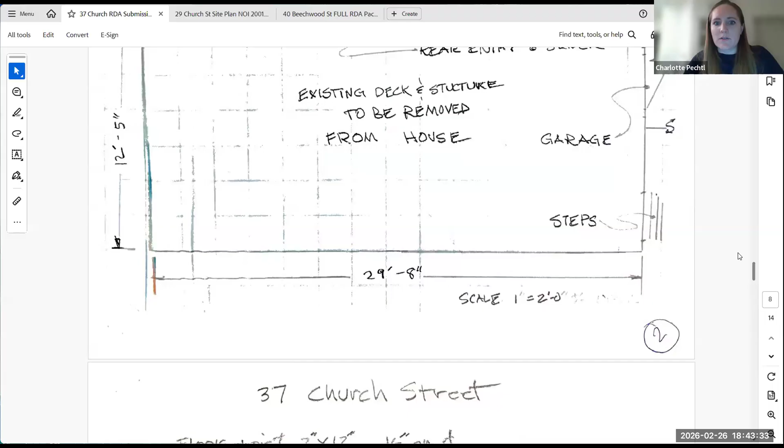Sorry, I thought I had this on here. There we go, get down to this. So these are structurals that were submitted to the building department. I just wanted to get to the plan that would help you guys. This is an aerial, so the 3-season porch will be installed in the same footprint as an existing open deck. We're going to need 3 sonotubes, so this will be raised, no foundation installed.

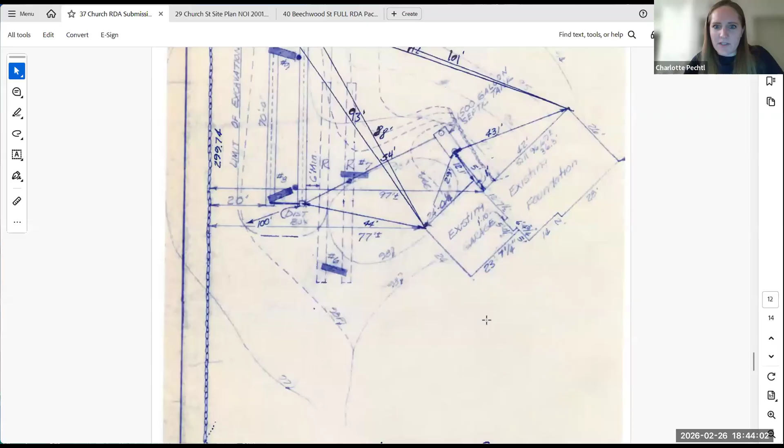I don't know where his well is, basically we put this together to try and help him submit an RDA. And from a wetlands perspective, there are wetlands on the abutting property slightly north. We don't exactly know where the wetland ends, but I spoke to the homeowner and he was comfortable submitting an RDA and not asking the commission to verify any wetland lines, just assuming that he's in the 100-foot buffer zone. I do not believe he's in the 50, based on where the existing wetlands are on the opposite side of the site. So this is a wetland delineation.

For this half of the site, his project is going to be around over here. So again, we don't know where the official line is. This is from an old septic plan, but based on the vegetation and contours here, we definitely know there's a wetland, we just don't know where it ends. So that's why I just had him submit an RDA for the proposed screen porch over the existing open deck.

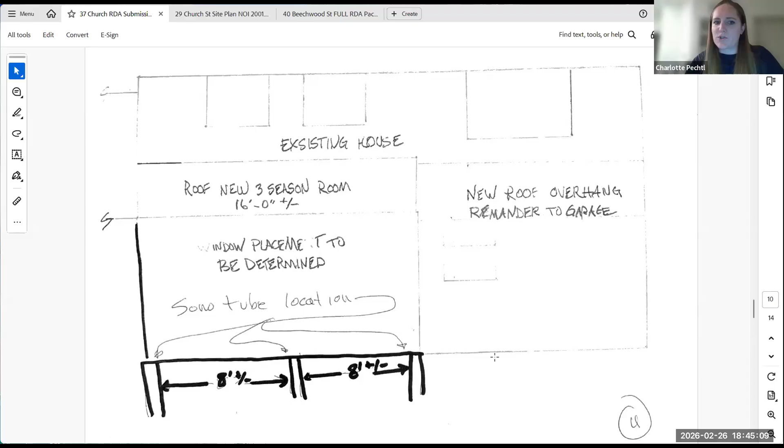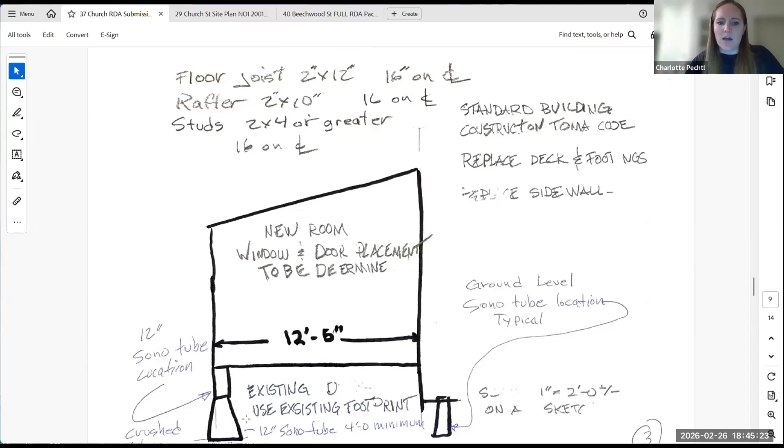Footprint, so there will be an increase in roof runoff. But since the screen porch is going on 3 sonotubes, he clarified this design with the building commissioner. At least from a buffer zone perspective, other than the roof increase, there doesn't appear to be any additional impact from what's already there, because the existing deck is already on piers and it's pervious. So again, the only change would be the increase in impervious. Obviously, some temporary work in the buffer zone during construction as well.

Do you guys have questions on that? This is the RDA he had put together. Let's see, what was the size again? 12 by 16, but the existing deck is the same size.

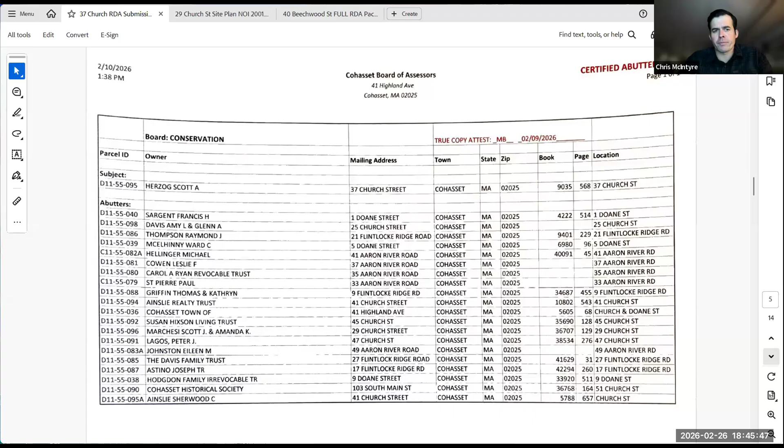So we're assuming it's in the 100, but we're not sure, and you're quite sure it's not in the 50. I'm very confident it's not in the 50, but I am also very confident that some portion of the work is definitely in the 100-foot buffer, based on what we were looking at in the files and on site. It's just hard to figure out where the wetland is right now because it's covered in snow. But in speaking with the applicant, he doesn't want to investigate the wetlands.

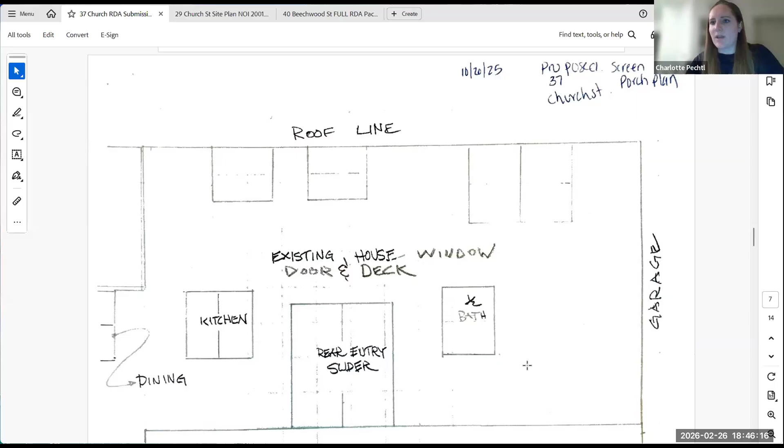He is aware that there's a wetland over there, and his work could be within that boundary. Okay, and again, it's already a porch there. It's just building, up. I was gonna say this picture within might be more helpful.

So this is the existing home. The wetland delineation we have pretty much comes to here. So looking at contours and vegetation and looking at the site and other delineations, there are wetlands up here. There's an intermittent stream that goes at the very front of the driveway.

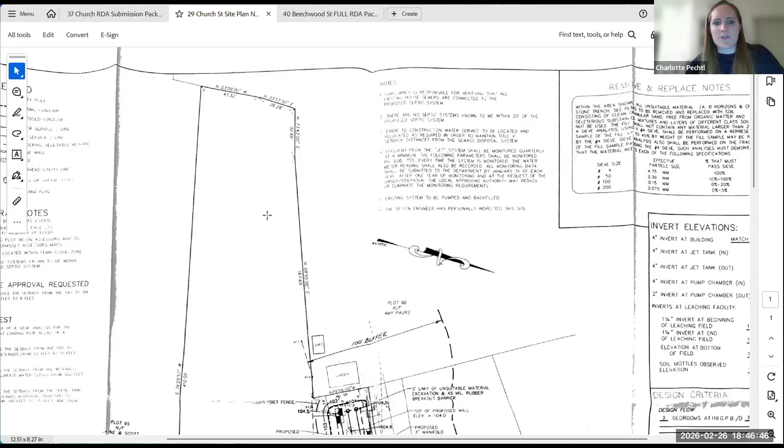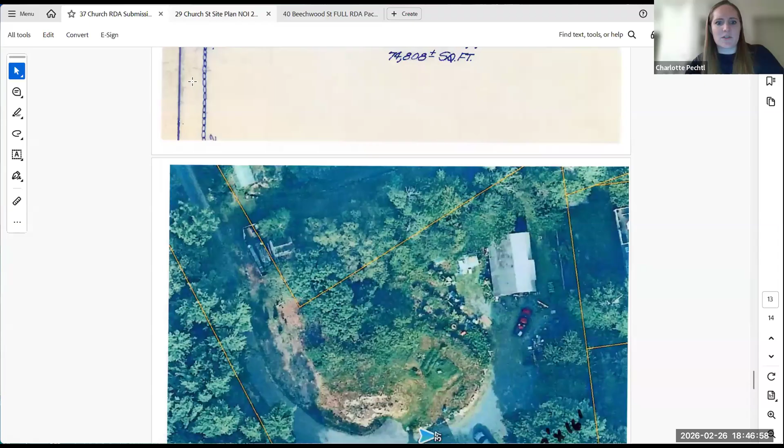A little bit easier to see, but there's another wetland up towards the driveway on the same property at 29 Church Street. This wetland here, with an intermittent stream, goes across to 37 Church, which is the property we're looking at, and there's an intermittent stream at the front of the driveway.

So this wetland and intermittent stream, at least in this area, is well over 100 feet away from the back of the home. But this wetland back here, we only have a delineation halfway down the site. Looking at the contours, we can assume there's definitely some sort of wetland, we just don't know where it ends.

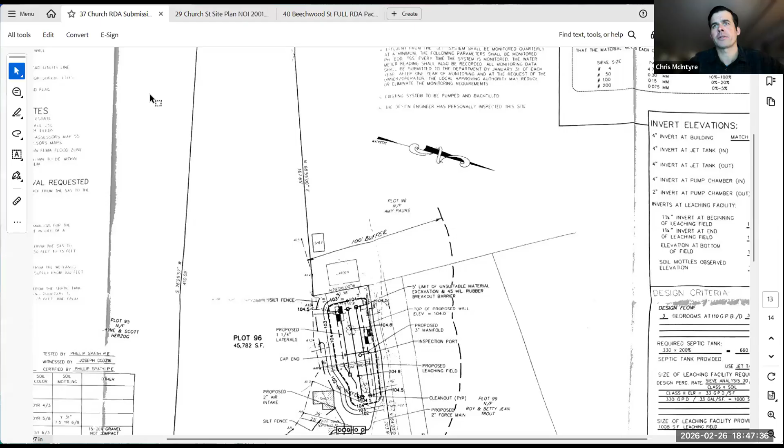He didn't want to ask his neighbor to flag it and investigate it, he just wanted to assume he's in the buffer and submit an RDA for the proposed work. His application said no heavy machinery or anything like that - it's pretty basic, small scale construction. Any questions, commissioners, comments?

I don't care to make a motion. I'll make a motion then to close the public hearing and issue a -3 and -6 determination of applicability for RDA 26-02 for 37 Church Street. Our standard conditions for working within the 100, just that no heavy machinery be used, that sort of thing. Do I have a second?

I think you're muted, Kathy and Steve. You're both making seconds. Second. I will second, thank you. I'll take a roll call vote.

Steve Magnell, aye. Kathy Berrigan, aye. Will Ashton, aye. Chris McIntyre, aye. That vote passes 4-0-0.

So that RDA, I'm 90+% confident it's not in the 50, so I don't think you need a variance. Okay, yeah, that's what I was just thinking. All right.

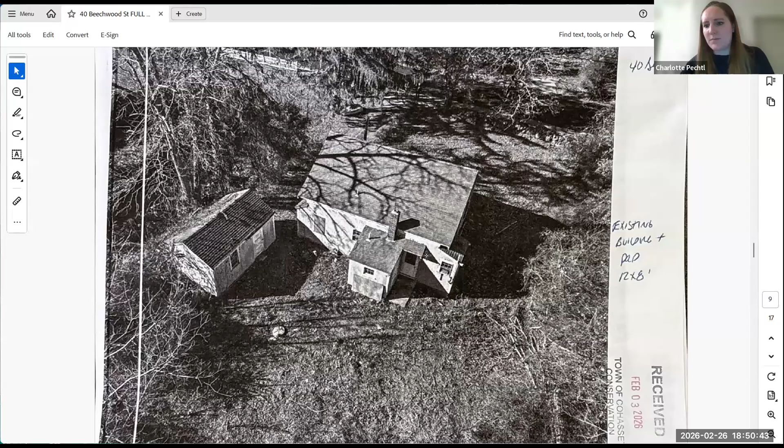That's a good one right there. You can see that building, the old building in the back. There's actually a washer and dryer and a heating system for the houses in there, you can see the chimney coming out of there. And I want to take it down.

I want to make it the same size as to the right of it, you can see a pad and a door. I want to make the building that size, that's going to be the kitchen. I'm going to push the kitchen out into that room to give it more room in the house, and I'm going to move the heating system upstairs in the attic.

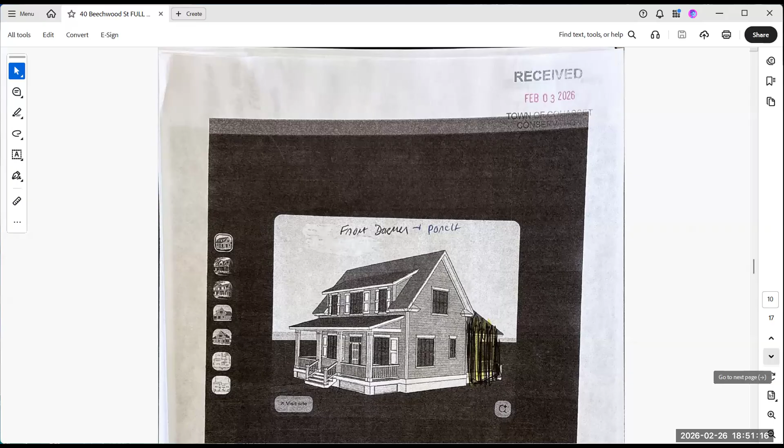And I see the front right there, that's basically to make it pretty, to tell you the absolute truth, to make a front porch on it, make it nice. We all hand dug, it's the whole reason for that front porch.

And Gary, is that existing patio impervious or pervious? The patio is cement. So it's impervious. It is, yeah.

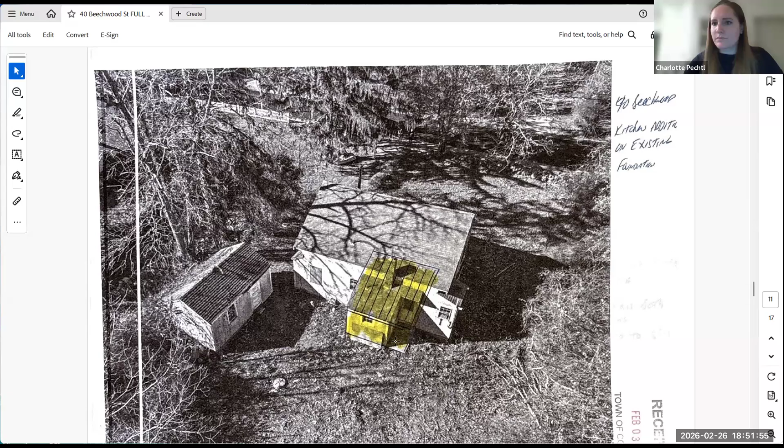Is there a porch already in the front and you're building a roof over it, or is that going to be new construction? That'll be new construction in the front with 4 footings.

And is the whole site in the riverfront? I'm not sure about the entire site, but the majority is definitely in riverfront. This is an old plan showing the wetland buffer and wetland line. So we're dealing with buffer zone and riverfront. Not sure where the 50 is, but I'm pretty sure it's not in the 50. The entire project is within riverfront, though.

So would work be done with heavy machinery? What are we talking about for constructability here? What's the approach?

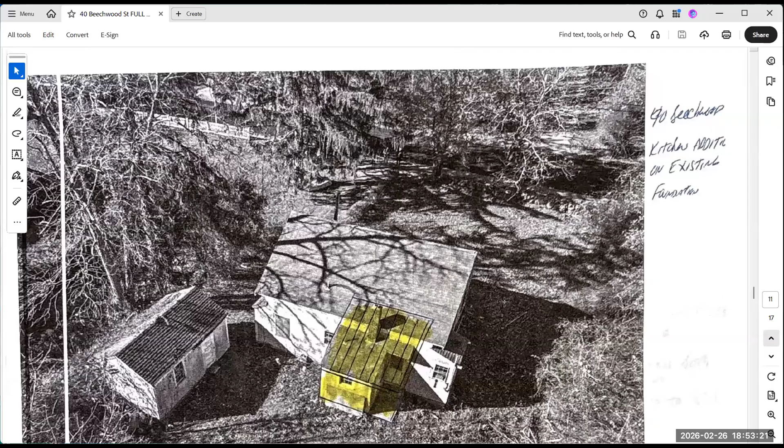For the back on the kitchen side, I'm just going to tear it right off. There's an existing foundation there already, so it'll build on the foundation, as you can see in the picture we showed, with a new roof line extending over that patio as support. You can see that roof line right there. It's pretty simple, but it opens the house up instead of leaving an outbuilding up there with a heating system and everything else outside.

Kind of weird. And for the porch, the pilings and everything, are you bringing in machinery for that? No, that's all hand dug. We dug it, it's just 4 footings, you can see the 4 posts. We always hand dig our footings, simple as that.

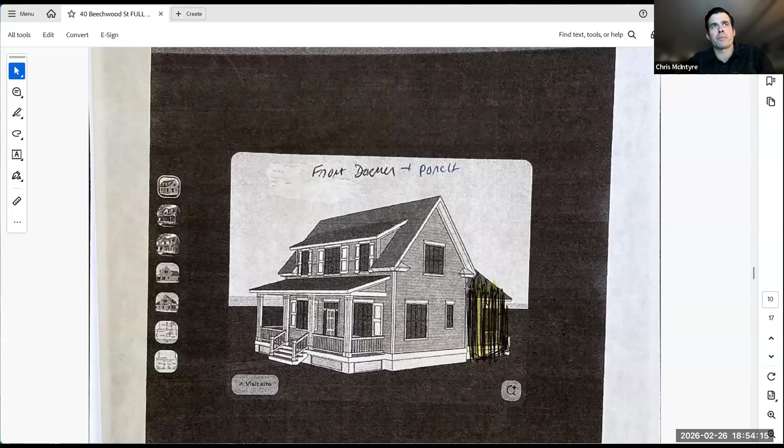Just to differentiate the two, we just saw a project assumed to be within the 100-foot buffer, whereas this is in the 200-foot riverfront, which we're presuming this is in, correct? The front and the back? Is that how I heard you, Charlotte? Yes, we consider that a resource area, not just a buffer. So there is that distinction I would just note.

There's a little bit more work here. Commissioners, any comments, questions, or input here? Steve?

Muted, Steve, if you're saying anything. I don't know. You're still muted, Steve.

I'm just trying to see where the river is. I'm looking at Near Map to see where it is with respect to the building itself, because certainly all of the areas are within the buffer zones of the pretty much adjacent wetlands.

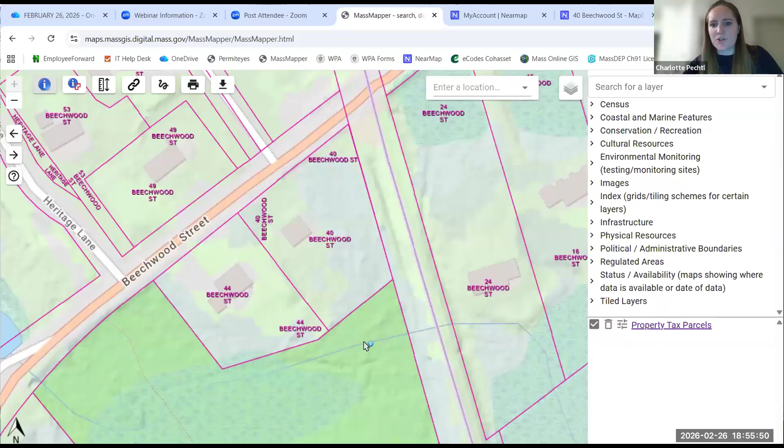It's about right here, Steve, plus or minus. We have to go by mean annual high water, but just in terms of where the river is, I could even show Mass Mapper. I know this is obviously not an official delineation, but...

If you were to approximate where the river is, what's the distance to the front of the house? Just kind of ballpark it. Oh, to the street, hold on.

To the street it's probably 100 feet. Yeah, but actually to the river you're pretty close, Chris, plus or minus. The back of the home is definitely there. The porch may actually be just on or just outside riverfront, depending on where that mean annual high water line is. So the front of the home could potentially not be in the riverfront, or partially in it. It depends on mean annual high water, not the bank of the river.

The green areas are the estimated wetlands, but obviously this is not an official delineation, just going by estimated state wetlands. We had an old septic plan that doesn't show riverfront, but does show where that wetland delineation line is, which is a little closer than what Mass Mapper showed. It's hard to see, but there is a wetland line there.

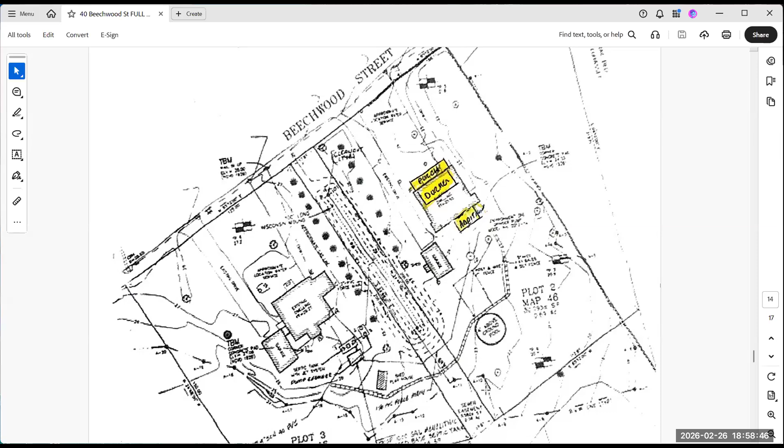What happens where the doorway pad is? That's to make the kitchen a little wider. Since it's already impervious, I think we might as well take advantage of the space instead of making it 12 feet - make it more like 16 feet for the kitchen. And we're only adding 25 square feet of new roof.

Kathy, do you have any comments or questions? No, I don't. Will, your thoughts? No, it seems the porch is the new impervious, and it seems it's either at the edge or outside of the resource. I don't think there's any adverse impact on this.

Okay, good. Anyone care to make a motion? Steve, are you satisfied? Or do you have any further questions? Don't have any others - no, you're not muted, Steve. I don't have any other questions.

I'll make a motion to close the public hearing and issue a -2, -3, and -6 determination of applicability for RDA 26-01 for 40 Beechwood Street with the condition that if there are any changes to the proposed plans in terms of building methods or foundation alteration, that we'd be notified and we would probably revisit at that point. But as the plan is, that's fine along with our standard conditions.

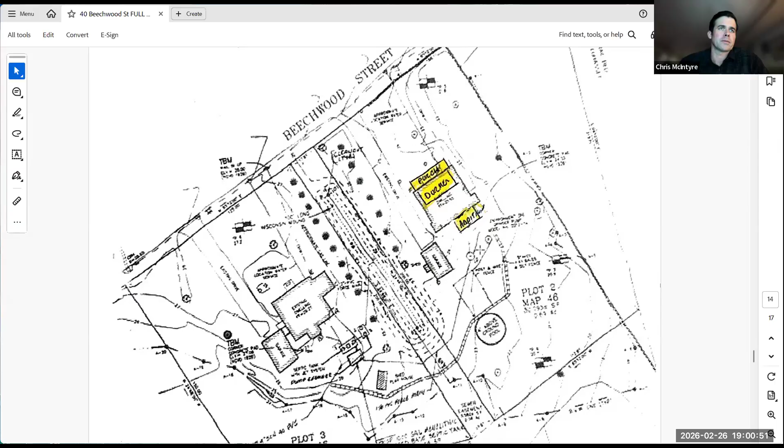Okay, I will remake the motion to close the public hearing and issue a -2, -3, and -6 determination of applicability for RDA 26-01 for 40 Beechwood Street with the condition that the applicant work with the agent for sedimentation controls and that any alterations to the proposed plans also be brought forth to the commission.

Do I have a second? Second. Thank you. With a motion and a second, I will take a roll call vote.

Steve Magnell... Steve, you froze. Oh Steve, can you hear us? I can hear you, everything was frozen there for a second. We're just going through the voting, so you're up. Steve Engel, aye. Kathy Berrigan, aye. Will Ashton, aye. Chris McIntyre, aye. That vote passes 4-0-0.

And we don't need to make a variance, so RDA 26-01 is closed.

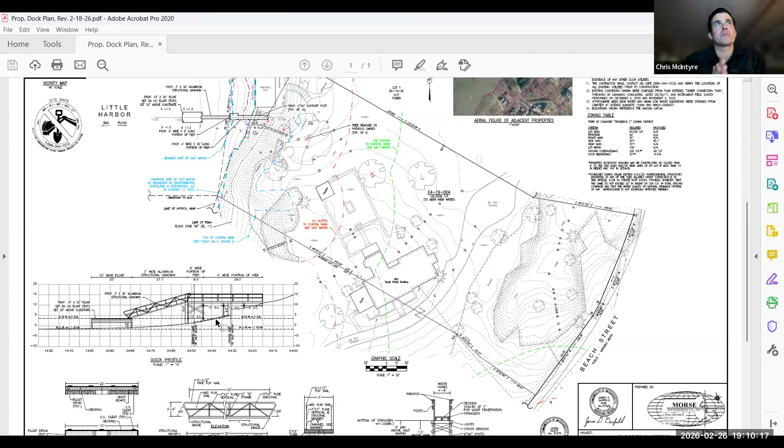And the methodology for driving the posts? Sure, so they're essentially driven by hand. It's a tripod setup, so you bring out a tripod that has a weight at the top of it. That weight gets dropped onto the post, and they drive them that way by a tripod. It's not a machine, it's not a pile driver, it's a manual driving. And the access to the location for the pilings, how would that occur? Sure, so across the yard here, you'd carry the materials down to...

Right now there's a retaining wall along the embankment, with a concrete pad up at the top. You would access over that wall. This area is cleared of vegetation, a cobbly beach area, and all materials would be brought in by hand coming off the driveway.

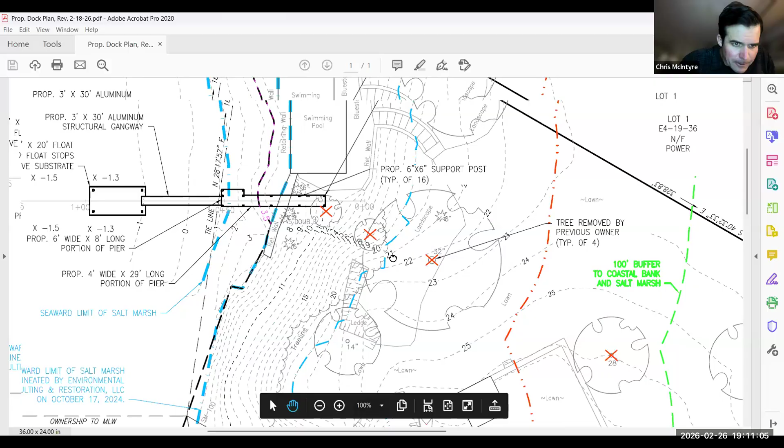Trying to distinguish where the pilings are versus the marshland. The marsh line is this blue line right here.

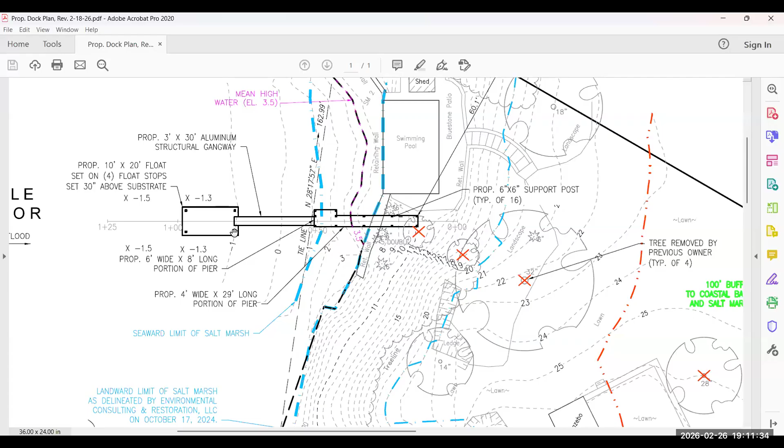There are 3 pilings at the end of the pier that would physically be in the marsh grass, and 4 pilings out at the float. Those are below the float, out in the mud flat versus the salt marsh itself, and they're there to keep the float off the bottom. When the tide goes down, there are float stops on those to keep it from sitting on the bottom.

The contractor uses plywood when working. They'd be waiting for the tide to go down and accessing it from the mud flat itself, not bringing any barge or equipment in that way. It's all accessed overland.

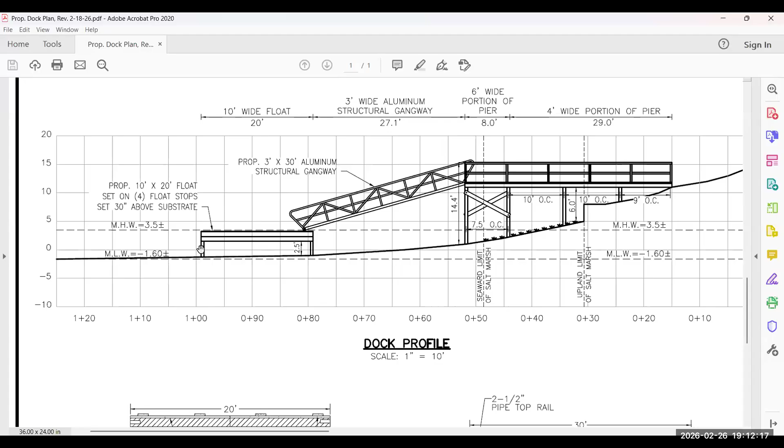Thank you. Steve, any questions or comments? No, I don't have any comments on this. It's a pretty straightforward dock on Little Harbor.

Thank you. Kathy, any questions or comments? Just wanted to say it was thoughtful of you guys, and nice that you offered to replace those 4 trees that were previously cut down by somebody else inside the 100-foot buffer. We would appreciate that if you feel like you want to do that. Thank you.

Thanks, Will, any further questions or comments? No, I'm good, thanks.

I do have one question about the trees. Was this plan initially submitted, or was it a transferred plan? I know it was continued. Sorry, Mr. Chair, we opened the hearing, read the public notice, and then continued, so this is our first discussion, if that helps. Oh okay, sorry, we have not had a prior conversation about this project, we just had to read the public notice and continue at the last meeting.

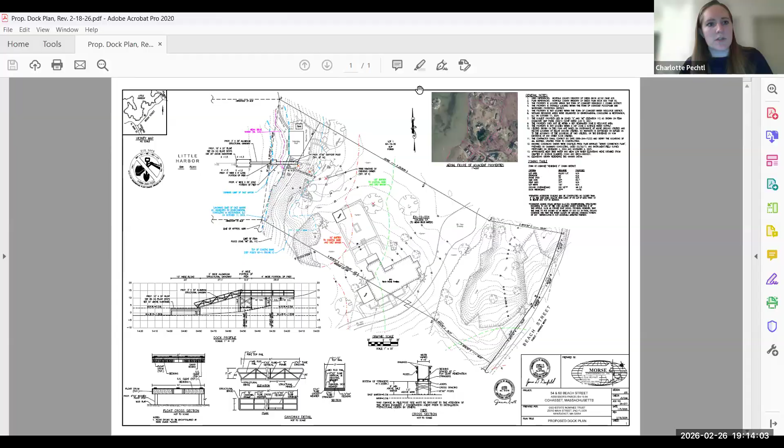And Charlotte, what's our recommended access protocol with plywood or something, is that strictly for grass or also for the mud flat? So specifically with the construction methodology we've seen with the contractor who installs I would say all of the docks in Cohasset, maybe except for one or two.

What he does is temporarily install plywood wooden boards in the marsh so that when they're traversing the marsh to install the piles, they're not walking in the vegetation and disrupting it. It helps displace the weight, but the boards are taken out at the end of each day so they're not left in there throughout the whole project.

They don't work in the mud flat, they don't use a barge, they work in low tide conditions. So they install the piles first, and once the piles are driven in, they take the plywood out and set staging in between the pilings so that they can work from the upland and then out. That's normally how they do it.

And I just actually drafted some conditions from previous dock projects that are very recent, so I can include those as part of the conditions if the commission were to issue an order.

There is feedback from DMF, isn't there, from January 22nd? Let me see, they had a few comments. I'm not sure if you can beat me to it, but I can pull them up. I don't have a copy of those with me. Okay, no worries, give me one moment.

One of them was definitely, I'm sure Greg you've seen this before, the 1.5 to 1 height-width ratio, that's kind of become a standard now. DMF acknowledged that as one of their comments, and we do comply with that with this design. I'm just going to pull up the email from DMF that they submitted back to me and to James from Morse. Again, they're good with the 30-inch clearance above the mud flat, which is the 1.5 to 1 height width ratio over the marsh.

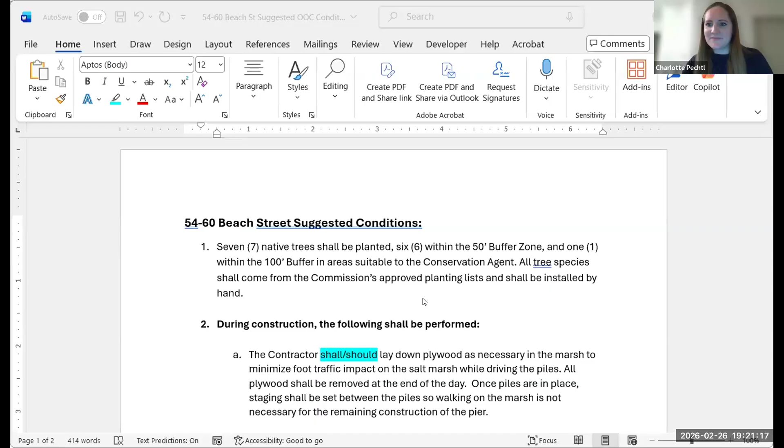We'll source that, it being from the Amazon rainforest. What's that? Mahogany or something might last longer. Yeah, exactly, some hardwood out there would.

So, just type this up so I can read through it. Seven native trees shall be planted: six within the 50-foot buffer zone and one within the 100-foot buffer, in areas suitable to the conservation agent. All tree species shall come from the commission's approved planting list and shall be installed by hand.

Did we agree on seven? Yes, I think we said two to one. So that's seven total. Okay, unless they want to do eight. More trees is better. Anything more than seven will be a very positive deviation.

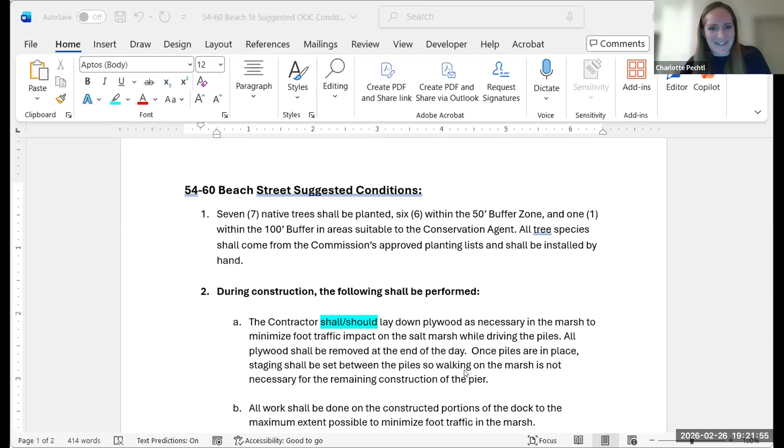So this is like, I can say 'shall,' but before I read the rest of this - I mean, Greg, I don't want to implicate the contractor at all, so I'm tempted to just say 'should.' I know he's had some questions with DEP in the past about this, but since Division of Marine Fisheries is recommending it...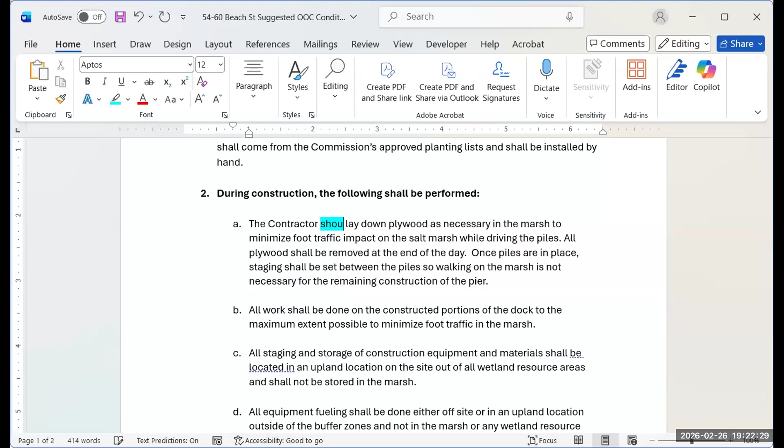I guess I could say 'shall,' but he does it anyway, so, you know. Just say 'shall.' Okay, 'shall' is fine. I know he does it, and I know we've talked about this problem before, but it's much less of an impact in the marsh, at least for the short term, because otherwise you have a million footprints in the marsh, and that could be more damaging to the grass.

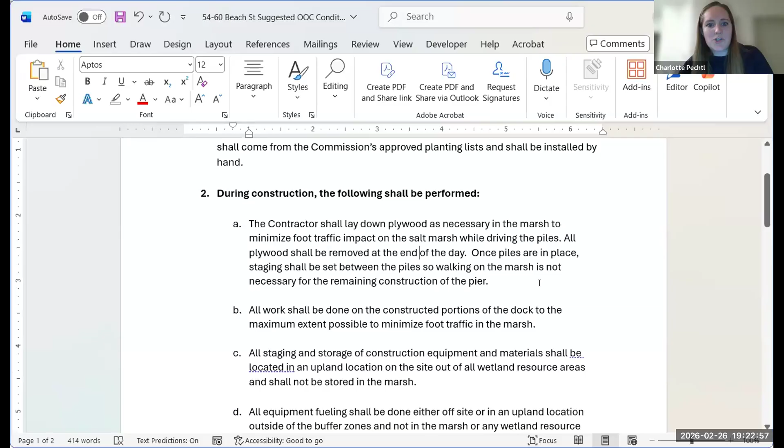During construction, the following shall be performed: the contractor shall lay down plywood as necessary in the marsh to minimize foot traffic impact while driving the piles. All plywood shall be removed by the end of the day. Once piles are in place, staging shall be set between the piles, so walking on the marsh is not necessary for the remaining construction of the pier.

All work shall be done on the constructed portions of the dock to the maximum extent possible to minimize foot traffic in the marsh. All staging and storage of construction equipment and materials shall be located in an upland location on the site, out of all wetland resource areas, and shall not be stored in the marsh. All equipment fueling shall be done either off-site or in an upland location outside of the buffer zones, and not in the marsh or any wetland resource areas.

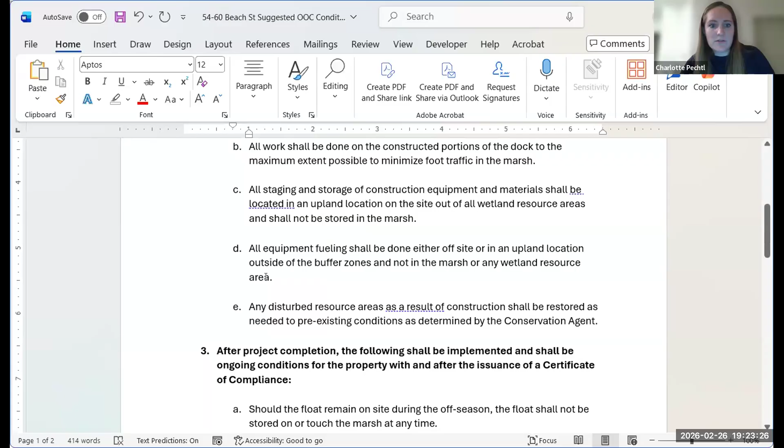Any disturbed resource areas as a result of construction shall be restored as needed to pre-existing conditions, as determined by the conservation agent. After project completion, the following shall be implemented and shall be ongoing conditions for the property with and after the issuance of a certificate of compliance.

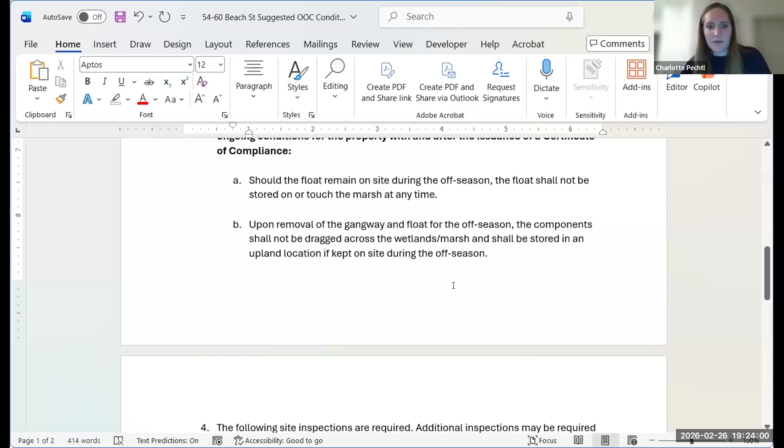Should the float remain on site during the off-season, the float shall not be stored on or touch the marsh at any time. Upon removal of the gangway and float for the off-season, the components shall not be dragged across the wetlands marsh, and shall be stored in an upland location if kept on site during the off-season. The following inspections are required: pre-construction, pile driving, and final, plus any additional inspections as necessary.

Very good, thank you. In any case, if that wasn't clear: hands off the marsh. Sorry, I know the wording's repetitive. Well, very good - everyone okay with those, commissioners?

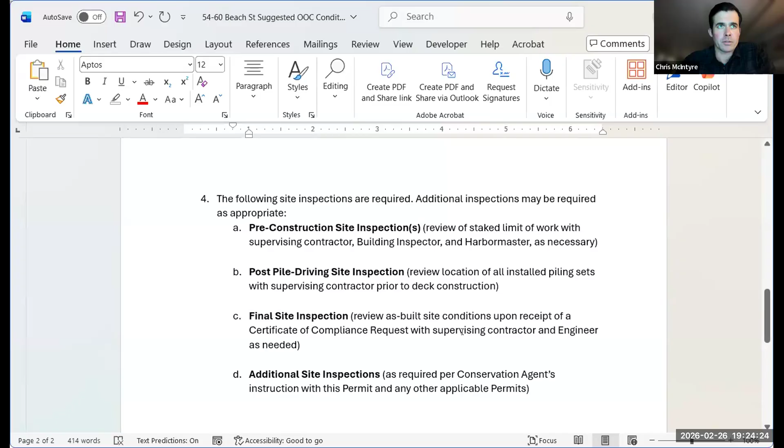Yes. Okay, then I'll make a motion to close the public hearing and issue an order of conditions for notice of intent 26-01 at 54 to 60 Beach Street, with our standard special conditions and the conditions previously shown on the screen and read into the record by the conservation agent.

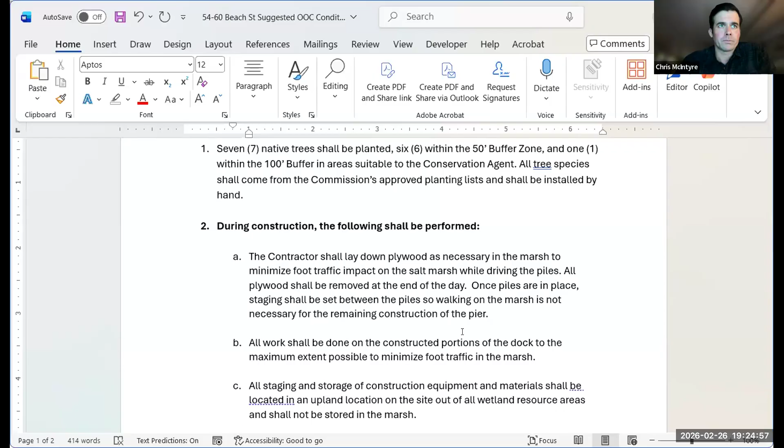Second. A motion and a second. I'll take a roll call vote. Steve Magnell, aye. Kathy Berrigan, aye. Will Ashton, aye. Chris McIntyre, aye. That vote passes 4-0.

I will also make a motion to issue a variance for NOI 26-01 at 54-60 Beach Street for the proposed work as shown within the wetland resource areas in the 50-foot buffer zone. Second. Roll call vote: Steve Magnell, aye. Kathy Berrigan, aye. Will Ashton, aye. Chris McIntyre, aye. That vote passes 4-0.

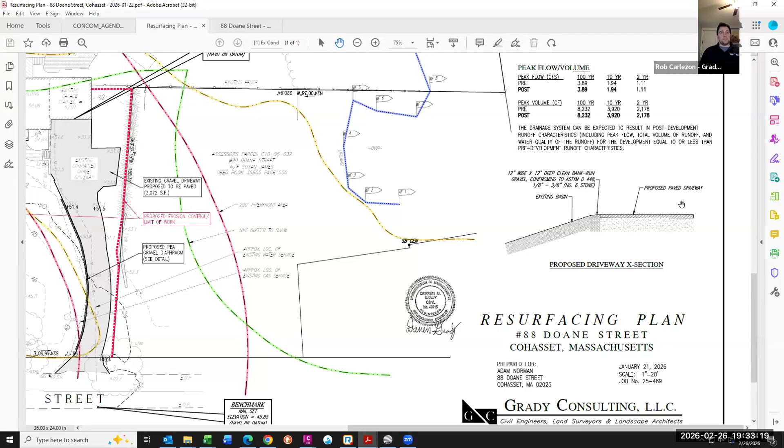So as part of the resurfacing project of the driveway, we've included a proposed pea gravel diaphragm, which is going to run along the left side of the driveway. It's a little small, but I'll zoom in on this strip here. Here is a detail of it, a cross section. This will be the proposed paved driveway, and in here you can see it's a 12-inch wide by 12-inch deep gravel diaphragm, which is to improve water quality and prevent sedimentation buildup from affecting the resource areas.

We also have a proposed mitigation planting strip along the left, or I guess it's the south property line, hatched in green. We have 517 square foot area proposed.

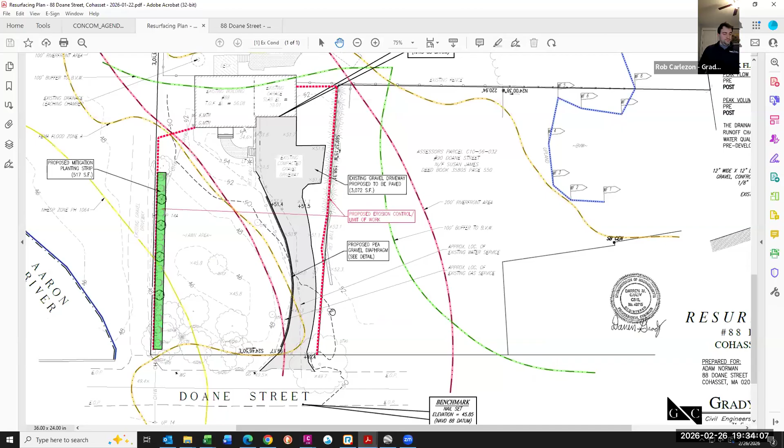We filed a variance request looking for relief... one sec here... looking for relief, lost the section here... CWR Section 40, altering more than 1,000 square feet of riverfront area, and relief from the 2-to-1 mitigation area requirement for altering more than 1,000 square feet of a resource area of the riverfront area.

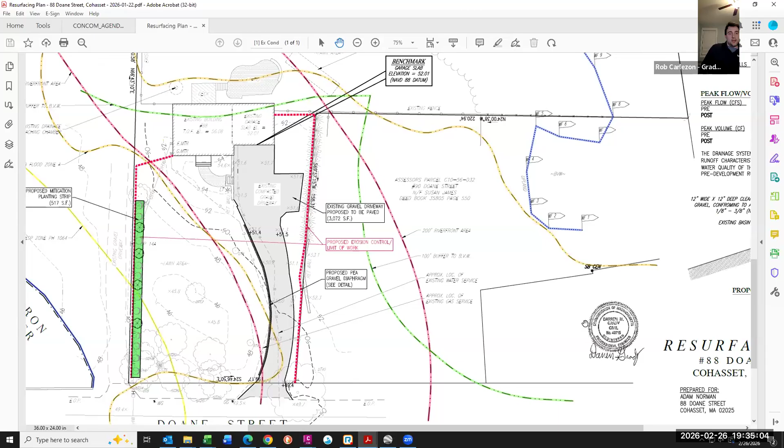We feel that because of this proposed gravel diaphragm, we will be improving water quality for runoff that will eventually make it to the Aaron River. We also have this planting strip, which will also help improve that water quality and prevent sedimentation. So that's pretty much the summary there, and I don't know if the commission has any questions. Okay.

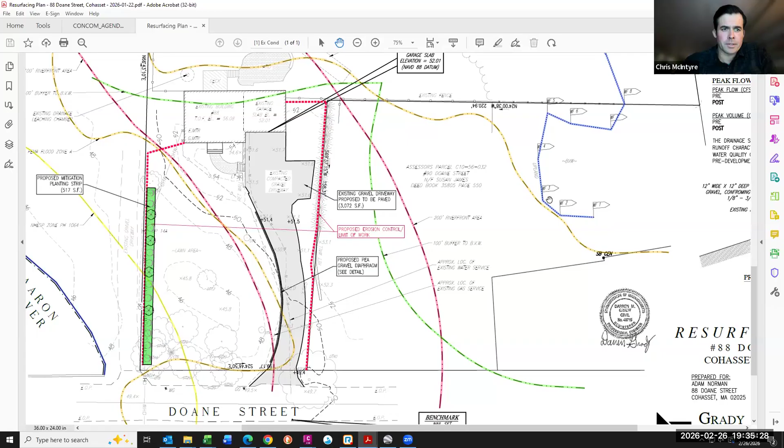Commissioners, any questions or comments off the bat? Is it bituminous concrete? Asphaltic paving, something like that?

Yes. My only comment, I'm generally okay with this, if it were some sort of concrete or non-bituminous pavers, something not asphalt. The reason is the initial runoff for the first few years after you pave something is dense in hydrocarbons, so I do think everything else you're doing is better than the situation before, except for that.

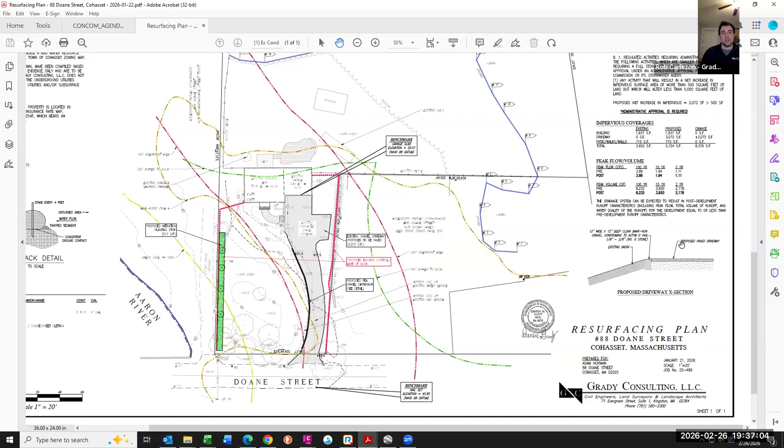So the idea for this was to have a more permanent solution for a driveway, something more durable. I think the applicant did discuss with Darren Grady in our office regarding a brick paver driveway that was looked into and considered, but the cost of doing a brick paver driveway no longer made the project feasible. Some of the initial estimates were about 3 times the cost of an asphalt or bituminous concrete pavement surface, so that's why we were hoping to get approval for pavement on this.

Can you just back up as to what you mean by a more permanent solution? What's the overall rationale for paving the gravel driveway?

I can jump in, this is Adam. I've been living at the property for 13 years and haven't done any alterations to the driveway. Over that time the gravel has, through plowing and rain, developed potholes. Every spring I have to throw stones back into the driveway - they get pushed around by the plow even when it raises the skids. It's been frustrating every year, and this year is going to be even worse than years past with all the snow and plowing we've had. So I'm just looking to have something that would stay in place and not have to go out there each spring and fix the driveway.

And besides bricks, were any other permeable alternatives investigated, like permeable pavement or non-bituminous options other than brick, that might not be so cost prohibitive? I got estimates from various paving companies on permeable pavers, and like Rob mentioned, it was 3x the cost of a paving driveway or more, in some cases 4 times the cost. So for me it was just prohibitively expensive.

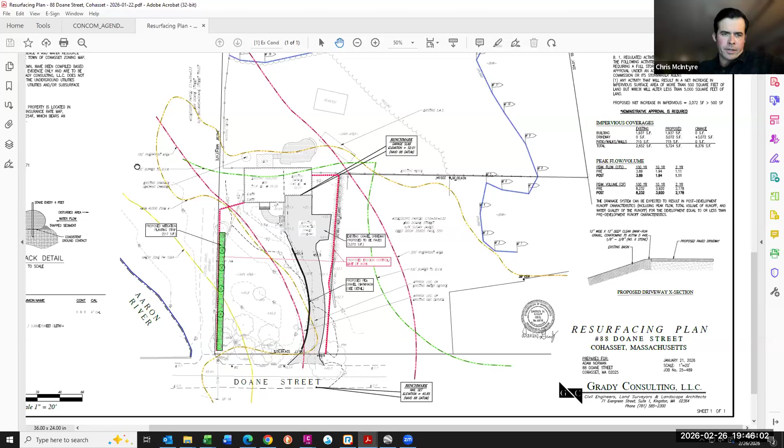Thank you. Can we talk more about what the planting situation is and what the proposed plantings will look like? Is that just going to be shrubs, or are you going to have grasses? So I believe we had a combination of deciduous trees and shrubs. I don't know all of the Latin names, but you can see them here on screen, zoomed in. So kind of a mix of trees and shrubs.

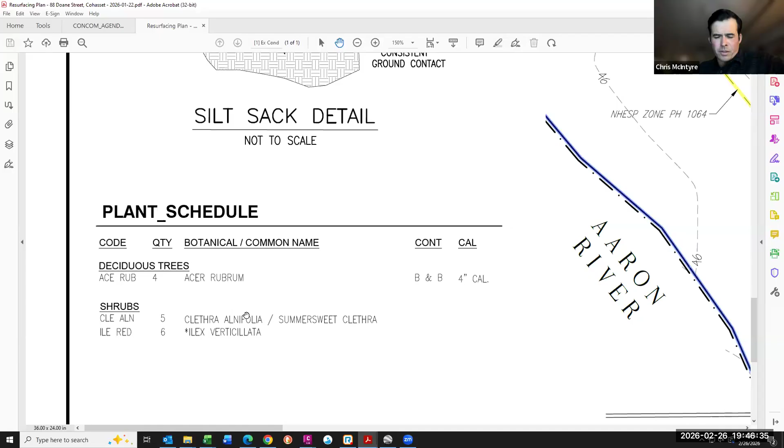Sorry, what was the width, 5 feet? Was that 5 feet wide? So the total square footage is 517. I think it's approximately 5 feet. I don't know if we have it dimensioned on the PDF here, but let's see. Yeah, I would estimate 5 feet wide or so. Basically, our idea was to have a line of trees and shrubs running up the side property line here.

Thank you. Steve, do you have any questions or comments? No, I don't. I guess my concerns are similar to Will's, but I don't know that there's another option other than pure concrete, which would probably be just as expensive as pavers. Okay, Kathy, questions or comments? No, I don't.

I'm not sure whether it's relevant for this approval process tonight, but in the 13 years I've been living on the property, I've planted 44 trees and more than 24 shrubs, which has helped — for example, a large weeping willow tree that started out 9 feet high has now grown to close to 40 feet, right in that zone, to capture some of that runoff. Good.

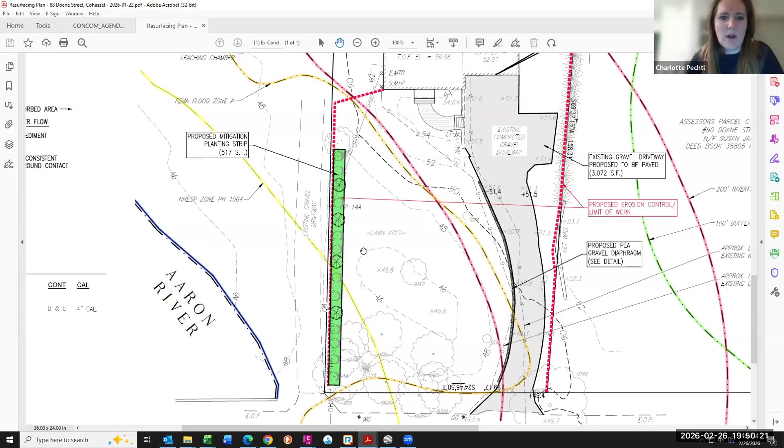There's an area, if you scroll up in the rear yard, that's closer to the wetlands—may be further away from the river—but that could still be worth considering, up by those first couple wetland flags in that northern rear corner. I know you have a lot of wetlands on site and a limited backyard, so that's something we could talk about, but that could be one potential way to mitigate it.

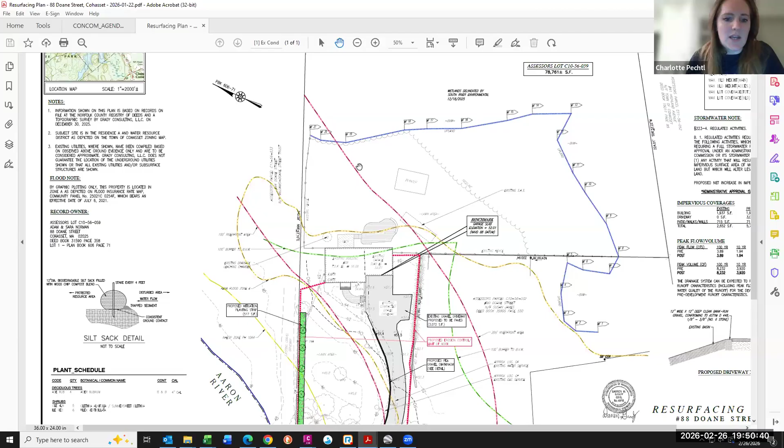Or you could increase that strip and/or increase the diaphragm. You could add a trench drain. I don't know what type of soils you're working with here, but there could be additional infiltration considerations to impose if you were to approve the paved driveway.

So, lots of thoughts. It really depends on what the commission's overall opinion is and what conditions they would want to see if they were to approve this. But you would still need a variance, in terms of altering more than 1,000 square feet of riverfront.

Yeah. Thank you, Charlotte.

I think that in general, despite the runoff values being similar, there is a difference in permeability between packed gravel, first point, versus bituminous, which is pretty much straight up impervious, right? And secondly, it is more of a—I think it degrades the resource, being made of tar and hydrocarbons and what have you. So I do want to consider that.

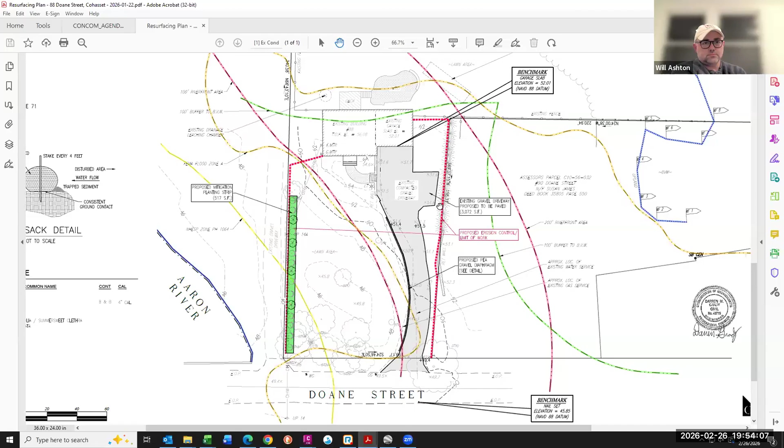I think there's a low point probably in the middle of the driveway, from the grade. So could you catch things there before they get discharged into that natural detention basin? Yep, so basically almost all points of the driveway end up in this basin.

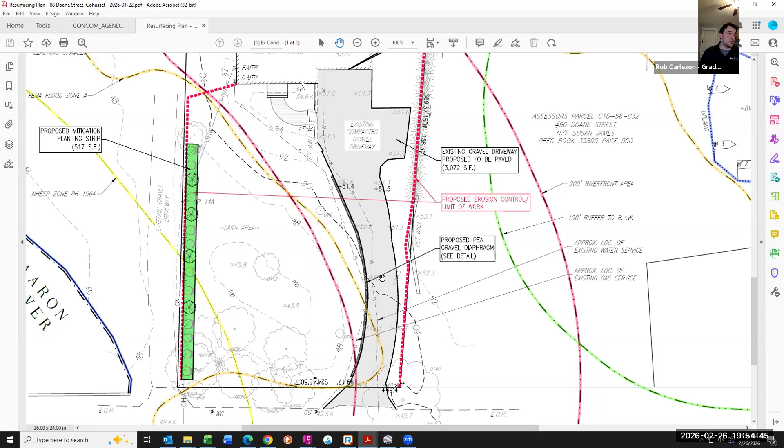As far as runoff, yeah—that's why we have a ton of spot grades, just to show that the general flow of water from all points of the driveway does actually make it over towards the basin, so that it's captured here before it gets to the river. I'd say this is a unique situation where this isn't just runoff going straight into the river—it's running off into a natural detention basin where sediments are filtered before they reach the Aaron River.

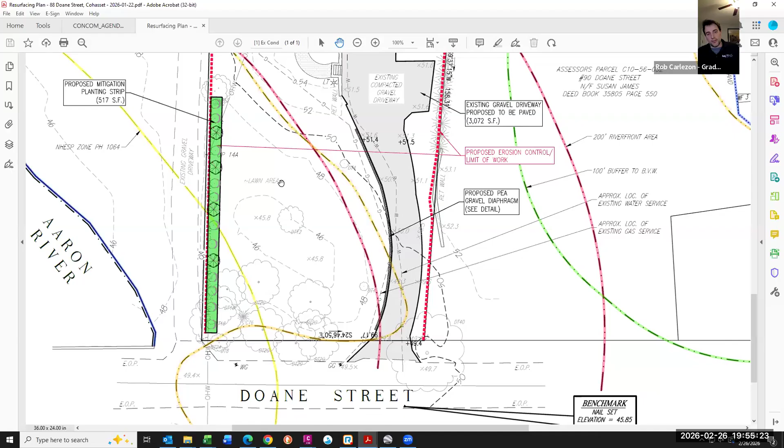What's the thought—is the applicant open to increasing the width of that strip, to kind of guarantee and improve the functionality of that strip, to make it more appealing, at least for me, in terms of improvement? Sure.

So would you be willing to double that? Yeah, Adam? Yeah, I'm open to it. I mean, I love planting trees and shrubs and anything. I don't really make much use of the front lawn, so I'm open to additional plantings and additional mitigation, whatever it takes to make sure there's as little impact as possible.

I like that. My only comment would be to get a little more creative with the shape. There's a ton of trees down front, so they'd probably survive. Make it a lot wider towards the house, not as wide near the trees, so they don't die from the shade, stuff like that.

Yeah, I think if you double the square footage along that side, and however it works with the lands... I don't know if you're going to have to hire a landscape architect. I don't think so, but work with your landscaper to find appropriate locations. If we could double the square footage, I think that would be easier to accept for me.

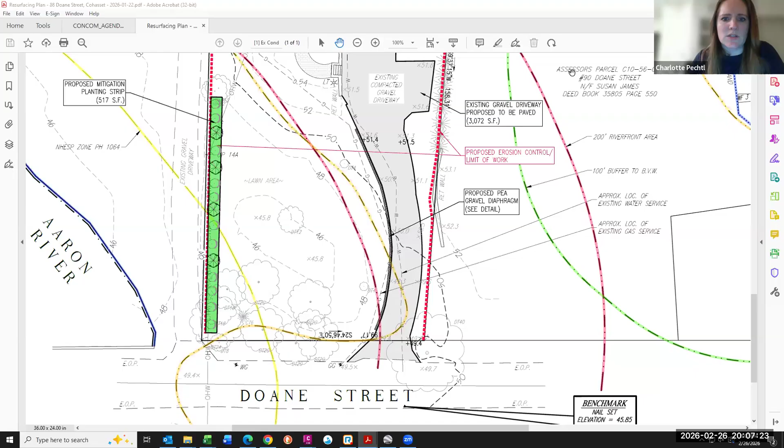Don't you need to add more pre-treatment, or does the diaphragm count for that? I believe the diaphragm counts for that. Yeah, are you getting that 25% or more TSS? Off the top of my head, I don't know. That is something I could verify.

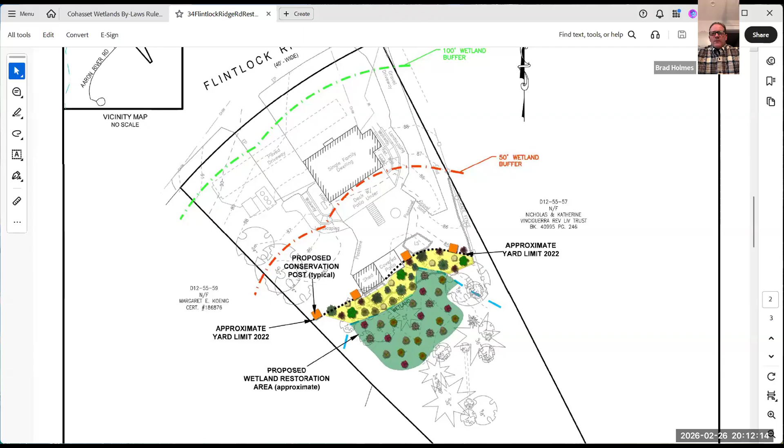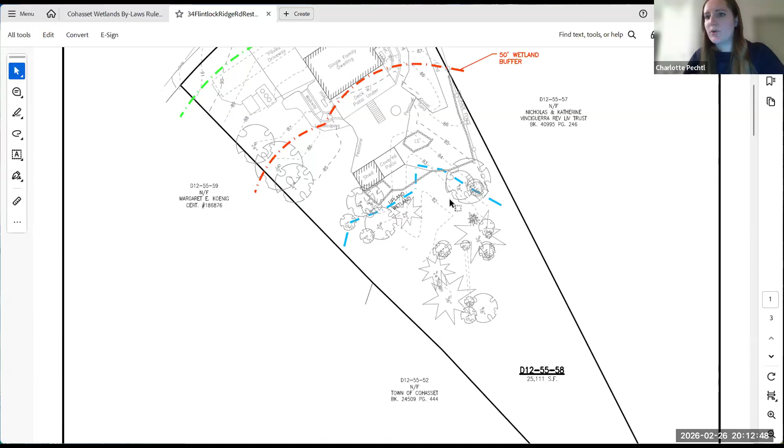Thank you, Brad. Yeah, so sharing my screen here, this is the approved restoration plan. Just to bring you back a little bit, we had Morrison, obviously Brad, work on existing conditions to know where that wetland line was before it was altered, as best as we could, given the fill that was on the site. So pretty much immediately after issuing the initial enforcement order, the majority of the fill in the wetland was removed, but there is some fill in the center that would still need to be removed. I think we do have to move some of the boulders. Brad, correct me if I'm wrong, they might either be in or just on the wetland line.

So the commission, when we issued the final enforcement order back in January '25 approving this plan, there were, as you can see in the 50-foot buffer here, other changes, landscaping changes that were made to the site without prior approval from the commission.

But at the time, obviously, the wetland was the utmost priority. So this plan was solely to address the restoration and the replication work for the wetland. And then in yellow here is just a native planting strip.

So wetland replication in green, buffer zone restoration, and the orange conservation posts. This was the plan last January. The commission had noted that we would come back to the buffer zones, and that's why we're here, to recalibrate the commission on where we are with this plan this spring. We're looking for commission input and any further action necessary to restore the 50 and 100-foot buffers.

The changes that happened at the time: this used to be lawn in the rear yard, as far as what I can see on Nearmap. So the installation of a deck - it did get a building permit, but just wasn't signed off, which might be more of an internal thing. Also the installation of the pea stone patio, the sand area with the boulder wall, and some additional landscaping paths. Most of this was in the 50-foot buffer, a little bit more in the 100.

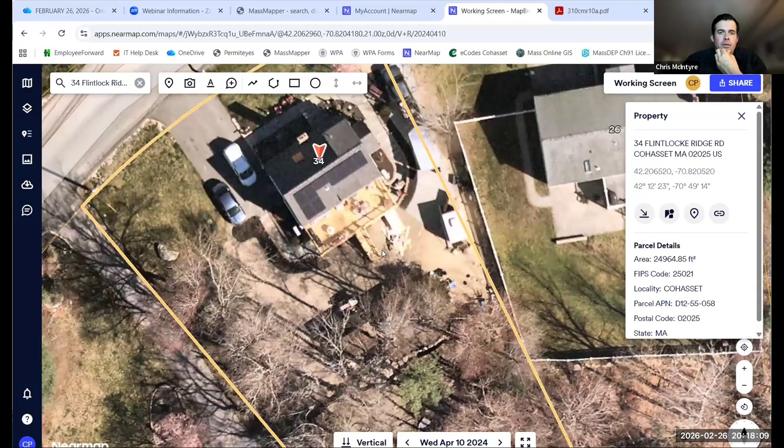So I guess bottom line is the 50-foot buffer was pretty much lawn already, from what I can see. Lori, I don't know if you have anything else to add, but at least based on the photos, it looks like it was lawn.

It was lawn. I can add a little to that. The restoration plan that was approved, that yellow shaded area, we made sure that we restored the buffer out to what was previously the approximate lawn edge, which was kind of at the back of the existing shed.

So, from that point out, within the area that was previously lawn, sand and some pea stone gravel was placed, which yes, would have been a requirement from the commission to get approval. But it wasn't an expansion of the yard, and maybe even at the end of the day, sand is probably a better substitute than lawn, which can be fertilized. That would have to have been reviewed, but it was all previously maintained lawn.

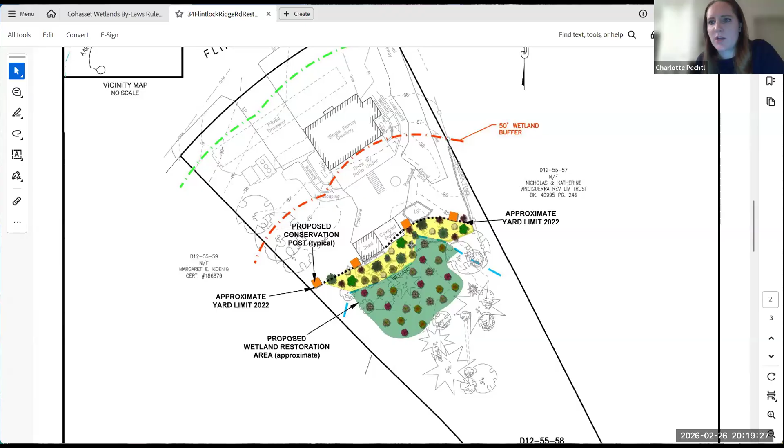So yeah, as part of the approved restoration plan, we dealt with the 50-foot buffer up to behind the shed and covered patio, but we kind of put a bookmark in it saying we'll come back to the rest of the buffer zone after the wetlands have been dealt with.

I think restoring it to its previous state prior to this work, even though it is buffer, it looks like it was lawn already, so I wouldn't impose any more. And is the shed still there and everything? Yes.

I don't -- do other commissioners have any questions or comments or thoughts on this? No, I agree with you. Steve?

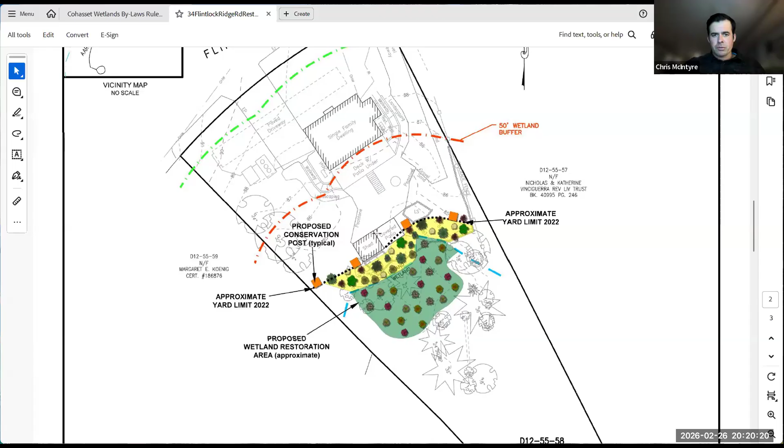I just had a question on the sheds that were there. It looks like the second one was actually added during the construction or just before. Yes, it's more like an overhang to the shed, I believe. It's a little hard to see, but I believe the shed -- Brad, you had delineated the site several years ago. The shed was pre-existing. There was a single shed.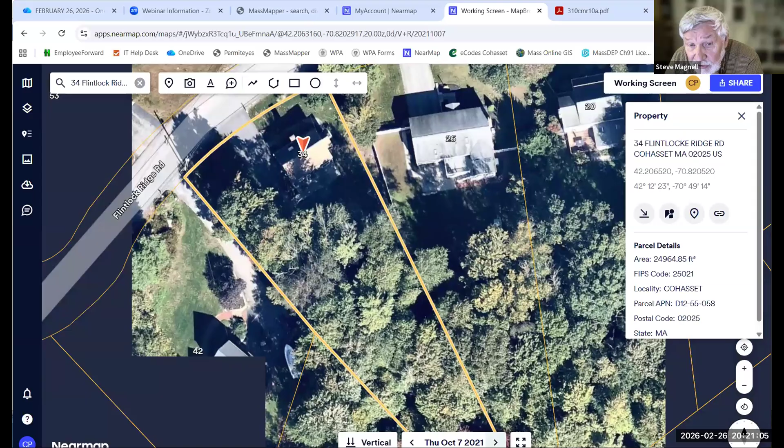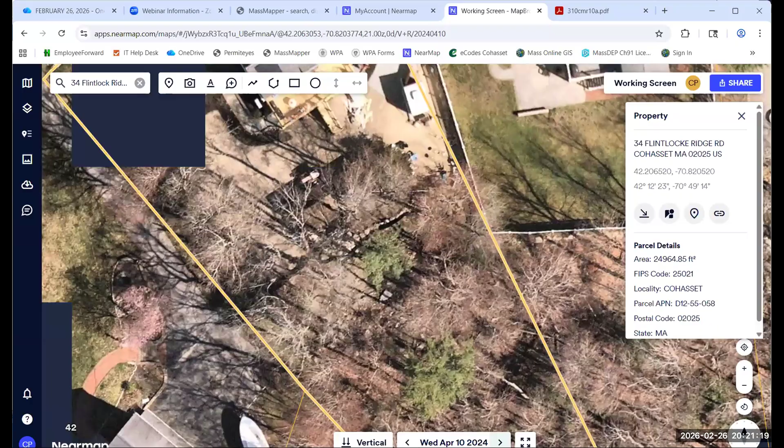Yeah, up through 2023 to the beginning of 2023, and then in 2024 a second one appeared, or if that's a covered something, but it looks like a shed from a previous year. It's like a gazebo, and it's not permanent -- it's a roof, temporary, open underneath, a temporary metal shelter thing that I can easily take out. It's kind of hard to see in the aerials.

Steve, would you want that to be removed if they sell or something, or what are your thoughts? I don't really have one way or the other. It seems that if that was where lawn was before, which was what it was, and it's just a covered gazebo, I could leave it there.

I'm not as concerned with the stuff that's in the 50 because it's all pervious. It's not any worse than lawn. So I'm not really concerned with most of the changes in the 50. Okay, that's interesting, Charlotte, I didn't know you could do that.

Yep, sometimes it's helpful rather than going through a million different time frames. You can look at two and then you can drag the bar.

So it sounds like, I don't want to say for every commissioner, but it sounds like Steve and maybe Will, you guys are okay with leaving the pervious -- or was that Chris? Do you mean leaving the sand and the gravel? Yeah, I mean, why is it there?

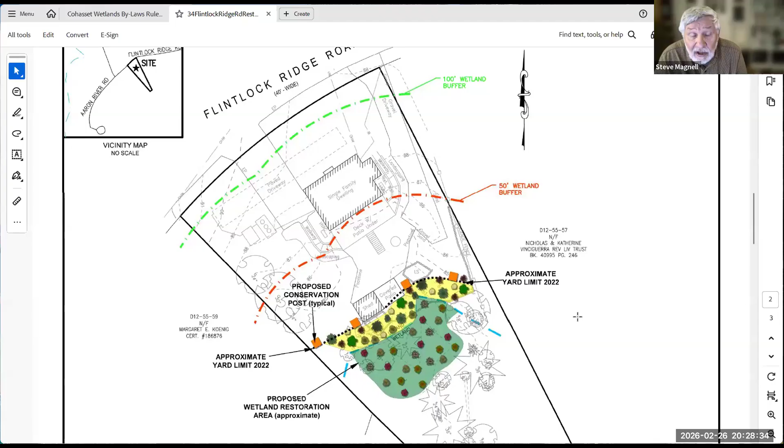Do I have a second? Second. Thank you. I'll take a roll call vote. Steve Magnell, aye. Kathy Berrigan, aye. Will Ashton, aye. And Chris McIntyre, aye. That vote passes 4-0-0.

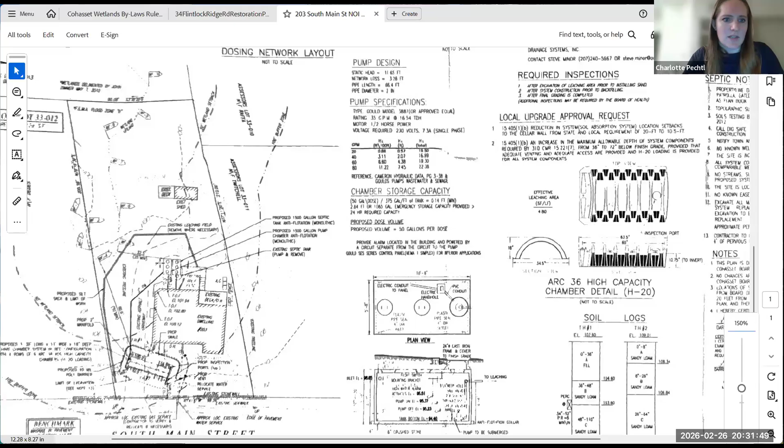In terms of the plans we had approved, I can pull those up so you guys can see them. Really, the only change was that the leaching field was rotated and pushed a little bit closer to the 50-foot buffer, but it wasn't put in the 50-foot buffer. So our original project, it's a little hard to see from a scan, but that's the leaching field right there. The tanks are in the back, where they should be per the approved plan based on the as-built. But this leaching field was just rotated a little bit closer, and I can pull up the as-built for reference, but it didn't go into the 50-foot buffer. So that was really the only change, and that was the only proposed work with this project.

So I have no concerns from a compliance perspective. This is the as-built leaching field. You can see it barely comes up to the 50 here.

The ongoing condition I would recommend is just our standard one, just the number is different. Number 35 for no chemicals in the buffer zones or resource areas. And with septic, they have obviously Title 5 inspections, so I defer to Board of Health for all that good stuff.

Anyone have questions there? No, I don't. Anyone else? There might be a slight encroachment of the 50. I'm not sure what this line is, it says poly barrier. So sorry, I lied - just a couple feet closer to the 50 than what was proposed, but it's still 50.9. At least the actual system, not counting the poly barrier, is 50.9 feet from the wetland.

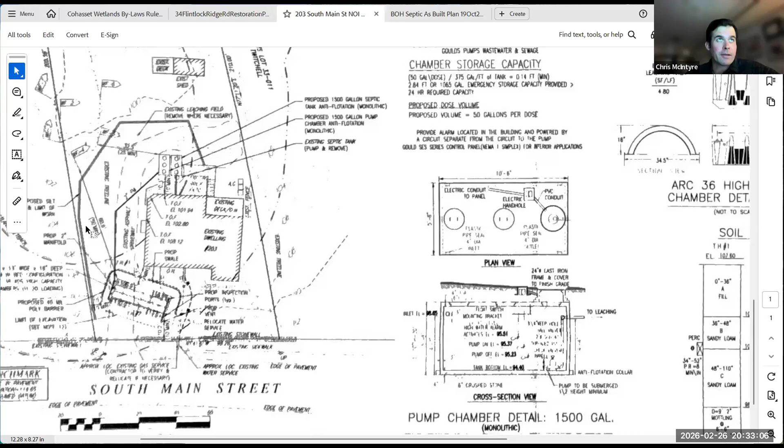And the proposed... well, I have to say that. What's up? Sorry, just trying to have your screen be transparent. I know, I'm changing my mind. No, okay, sorry. Okay, well, we're not gonna have them dig up the leaching field, so yeah.

Anyone care to make a motion here? Sorry, I'll discombobulate trying to get too many screens going. The ongoing condition would be 35 for that no herbicides one.

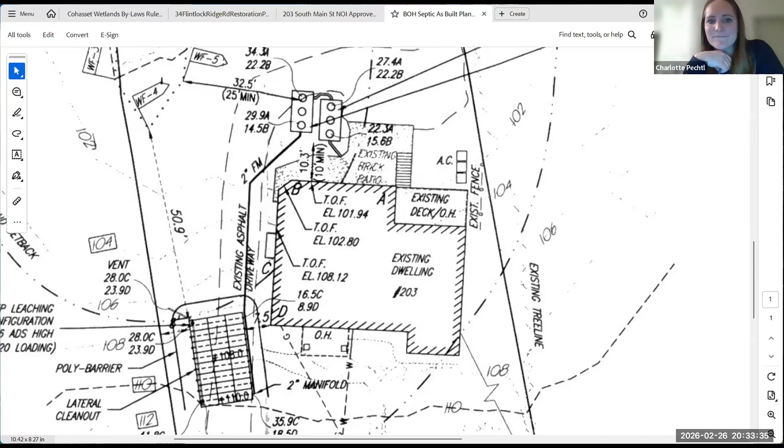All right, so I can make a motion to issue a certificate of compliance for NOI 12-21 at 203 South Main Street, with ongoing condition 35. I'll second that. With a motion and a second, I'll take a roll call vote.

Steve Magnell, aye. Kathy Berrigan, aye. Will Ashton, aye. Chris McIntyre, aye. That vote passes 4-0. So that COC is closed.

Are we switching back to the other one? Yeah, Brad, I don't see him. So we could just push it to 3-5. I think he said he was available that date, but we can confirm with him offline. I don't think he minded presenting. Oh, was that? I don't mind presenting either. Oh, okay, you want to see if he jumps on? Sure, and then if it all goes well, I'll just update it by email.

But I know that the commission discussed - we have a partial certificate of compliance, I believe. We're seeking a full certificate of compliance, but in order to do that, we need to carry out the mitigation plan and some vegetation management. We proposed treatment of Japanese knotweed using herbicide. I know the commission had a discussion on that and isn't favorable to using herbicide. So what we proposed as a modification to the management plan is just ongoing cutting with a cutting plan of the Japanese knotweed. I don't think we're going to be able to eradicate the knotweed, but I think we can manage it. And if we can manage it, it will allow that buffer zone between the lawn and the wetland to not be fully dominated with Japanese knotweed. If we manage it, I think we can still accomplish the mitigation plantings in that area, and he's just going to have to be diligent with ongoing cutting.